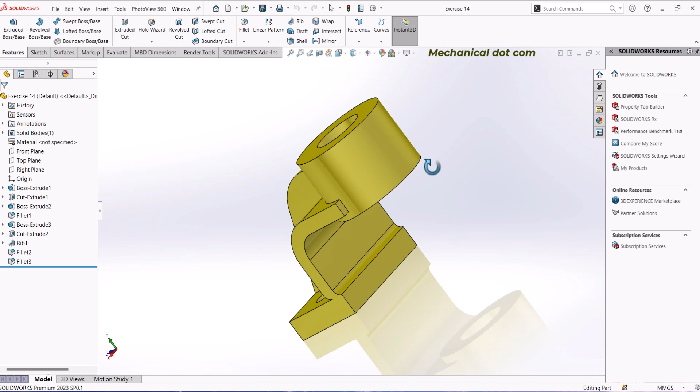Welcome to mechanical.com. In this video, we are going to create this 3D model with the help of its drawing.

So let's start our video. First of all, see its drawing. This is the drawing. See the base. This length is 92 millimeter and also the width is 68 millimeter. The thickness is 18 millimeter and also there are two circles. The circle has a diameter of 16 millimeter and the distance from this center to the outer line is 20 millimeter and also the vertical distance is 28 millimeter.

Also, there is another slot. This thickness is 14 millimeter and also this thickness is 12 millimeter. And this fillet radius is 6 millimeter and this radius is 18 millimeter. And from this point to this line, the distance is 53 millimeter. And also this total distance is 55 millimeter. See, this is 6 and this is 12. So 12 plus 6, which is equal to 18. So 18 will be in the downward direction and the remaining 37 will be in the upward direction.

So we will choose extrude boss base, and in the first direction we will extrude up to 37 millimeter, and in direction 2 we will choose 18 millimeter in the downward direction. Also in the top there are two circles. The outer circle has a diameter of 80 millimeter and another circle has a diameter of 40 millimeter. And we will use extruded cut and we will cut through all.

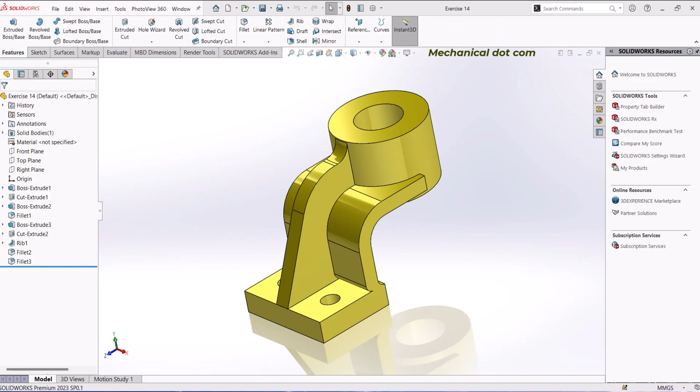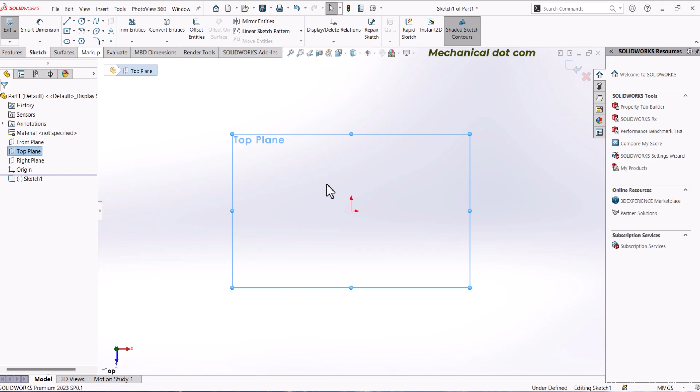Go to SolidWorks, close this file and open a new file. Click OK. Change the IPS system into MMGS system. Now select the top plane and sketch. Draw a center rectangle. Go to Smart Dimension. This length is 92 millimeter and this height is 68 millimeter.

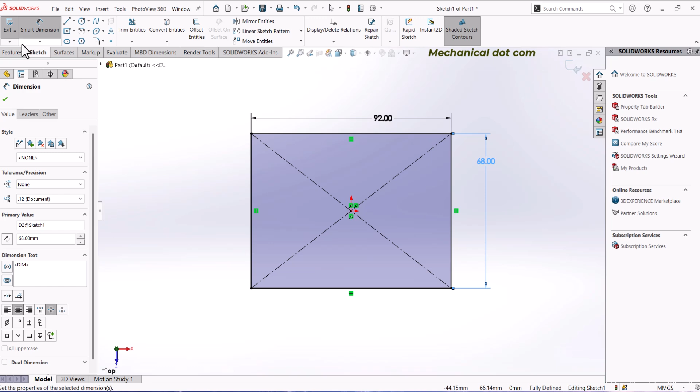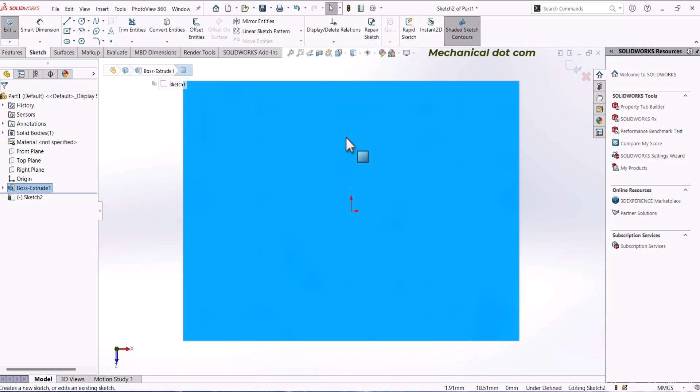Now go to Features, Extrude Boss Base, select Blind and type 18 millimeter. Again press Enter and see. Now select this upper face and sketch. Now draw two circles. Now select this circle, press the Ctrl key and select this circle and make them equal. Now go to Smart Dimension.

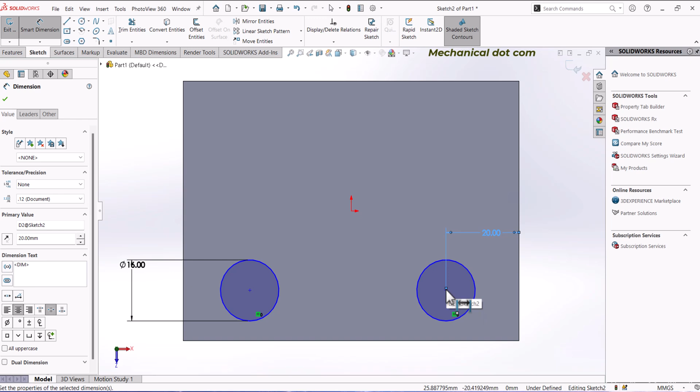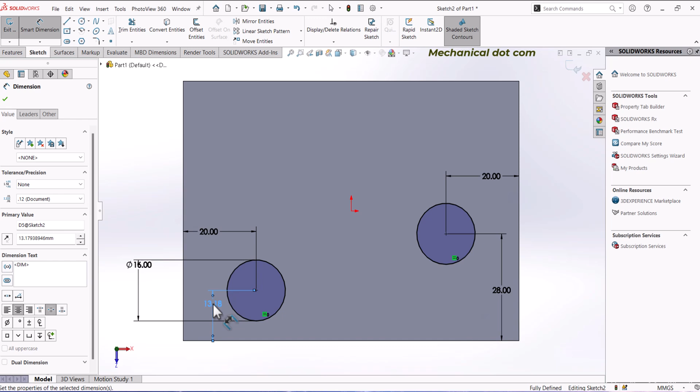Diameter is 16 millimeter and the distance from this point to the edge is 20 millimeter, and also the vertical distance is 28 millimeter. Same here. Click OK. Now go to Features, Extruded Cut, select here through all or just drag this arrow. Click OK.

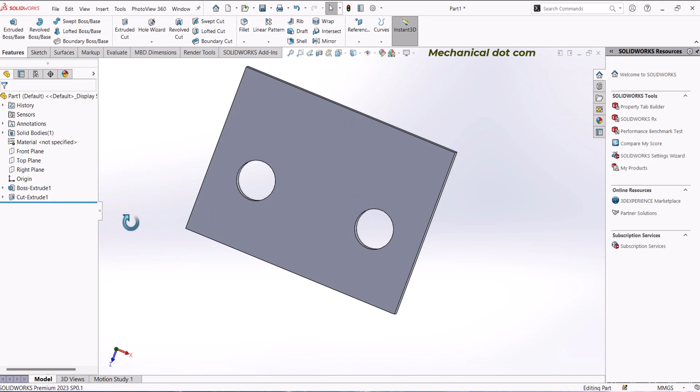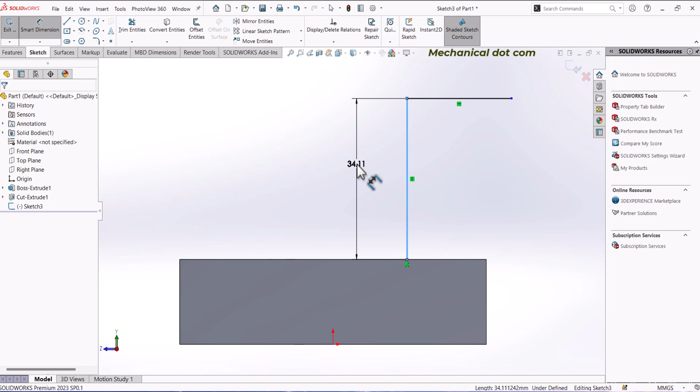See, now select the side face, sketch, choose line command and draw a line like this. Escape. Go to Smart Dimension. This height is 53 millimeter. This length is 63 millimeter and the distance from this point to this point is set.

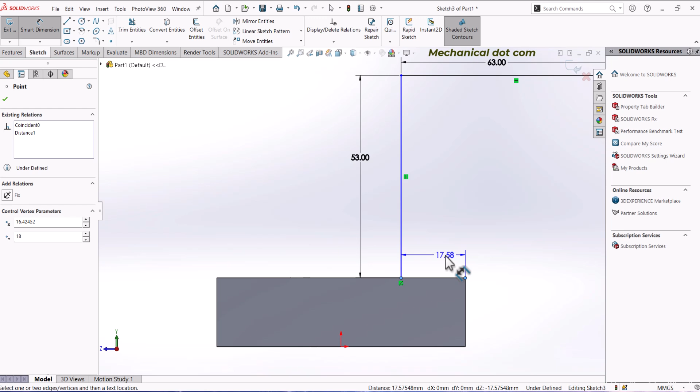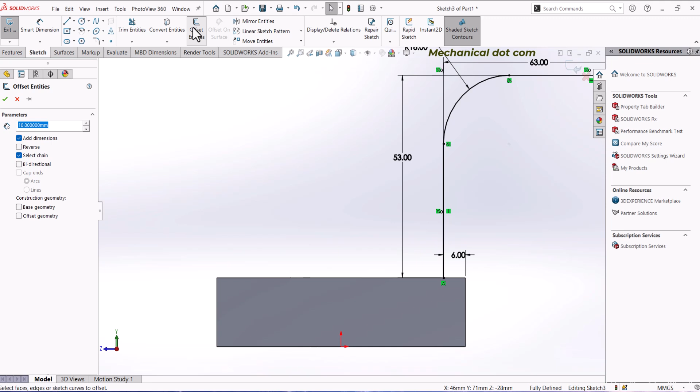Now click OK. Sketch fillet. Type here 18 and select this point. Click OK. Now offset entities. Select here this line and reverse and type here 12 millimeter because the thickness was 12. So click OK. Now close the geometry from both ends.

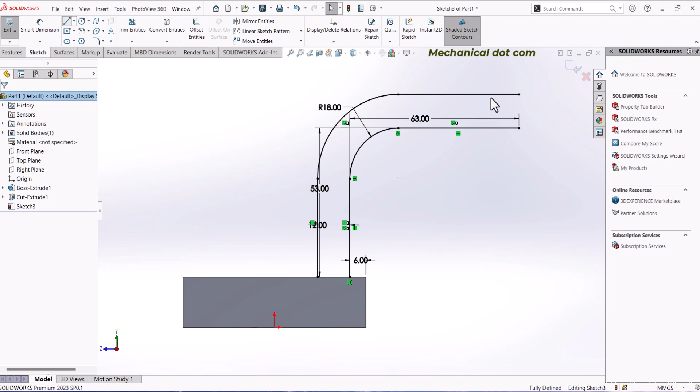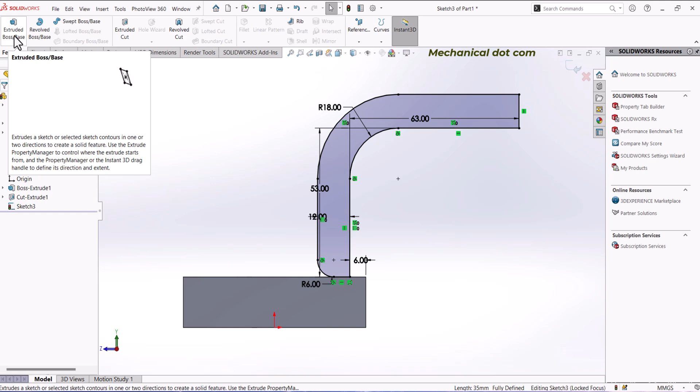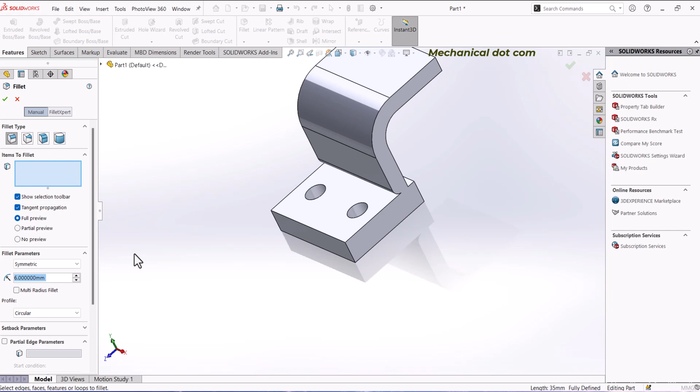Now sketch fillet. Type here 6 and select this point. See, and this corner we will define it later. So click OK. Now features, extruded boss base. Select here through all in the reverse direction. See, click OK. Now go to fillet. Type here 6 and select this line. Click OK.

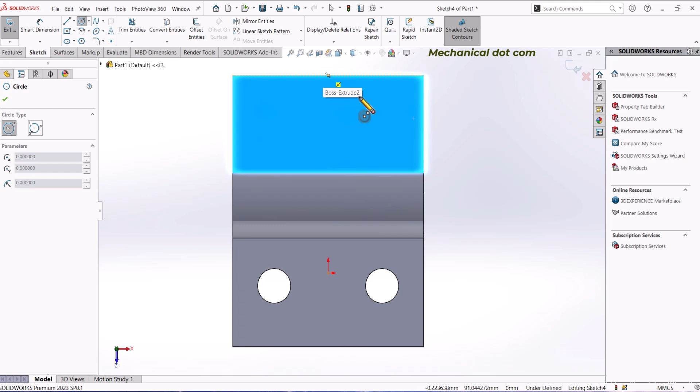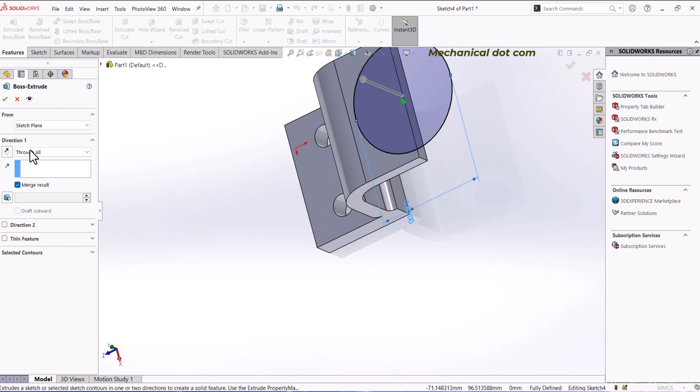Now select the top face, sketch and draw a circle from the center. Go to smart dimension. Diameter is 80 millimeter. Go to features, extruded boss base. Select here blind and type 37 and also in the direction 2 type here 18 millimeter. See,

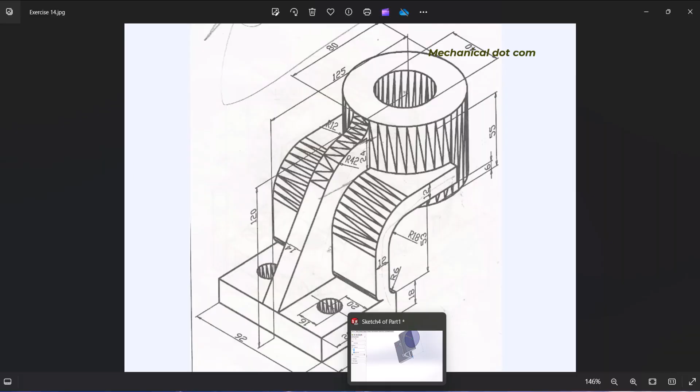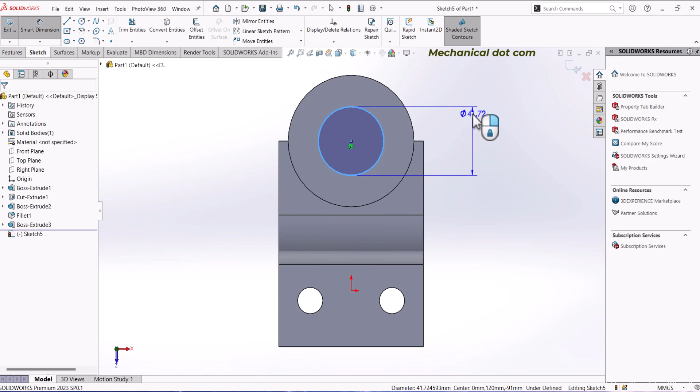and now the total will be 37 plus 18 which is equal to 55, and in the drawing see the total distance is 55. 12 plus 6 is 18, 18 in direction 2 and remaining 37 in direction 1. So again go to SolidWorks, click OK. Now select this top face and sketch. Draw a circle. See this plus icon. Draw a circle. Smart dimension. Diameter is 40 millimeter. Go to features. Extruded cut. Select here through all or just simply drag this arrow.

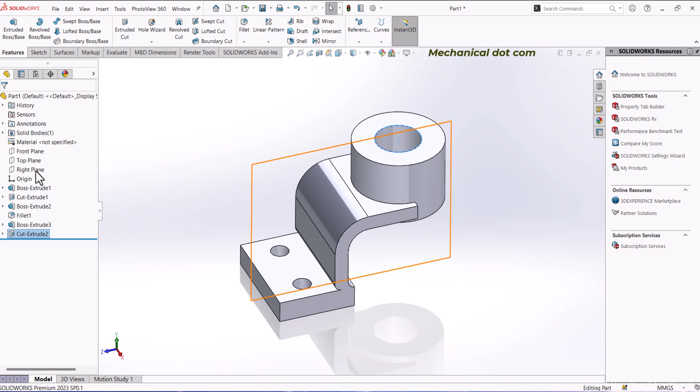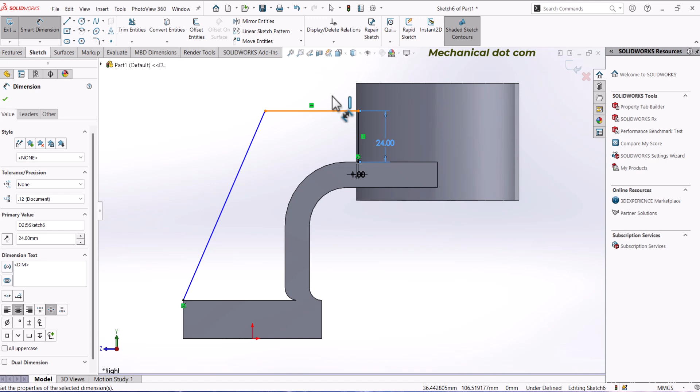Now we want to make this slot. So select here right plane and sketch. Go to line command and draw lines like this. Go to smart dimension. From this line to this line, the distance is 1, and this height is 24, and this length is 42. Click OK. Also select this line and select here construction geometry.

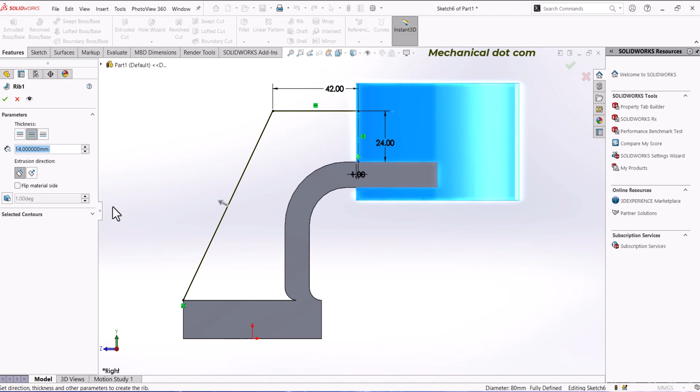Now go to features, rib, type here 14 millimeter and see the arrow, it is outward. So select here Flip material side and see it is now inverted. And select here middle option and OK. Now select here fillet. First type here 42 millimeter and select this corner. Click OK. Also again select this fillet and this time type here 12 millimeter and select this line. Click OK.